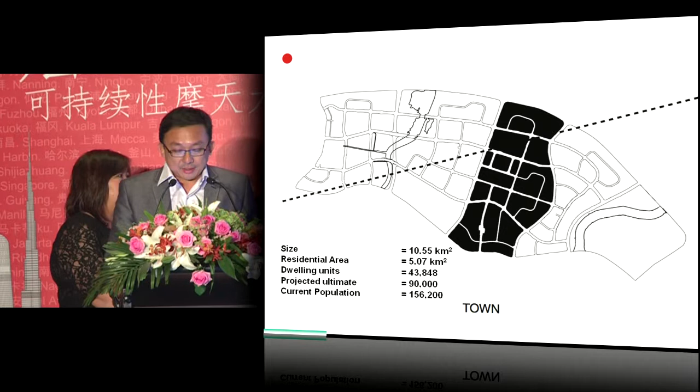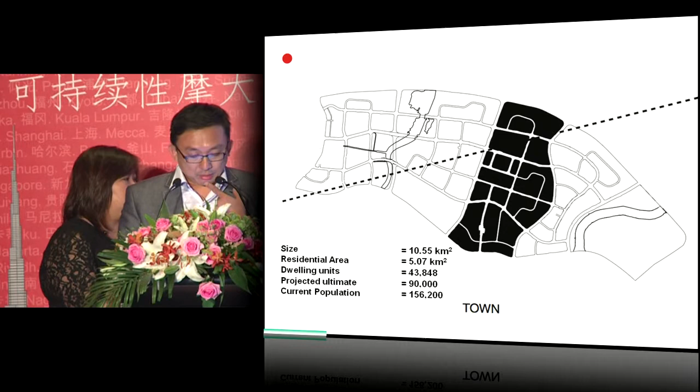I'm going to follow with a series of slides that takes a look at one of these new towns. It's not the newest, but it's still in progress. It's Sengkang on the northeastern side of Singapore. The area highlighted is the entire new town, roughly 10 square kilometers, with a planned population of 156,000, currently about 80,000 to 90,000 persons living there. The area highlighted is one neighborhood. In this particular new town, you have 5 neighborhoods.

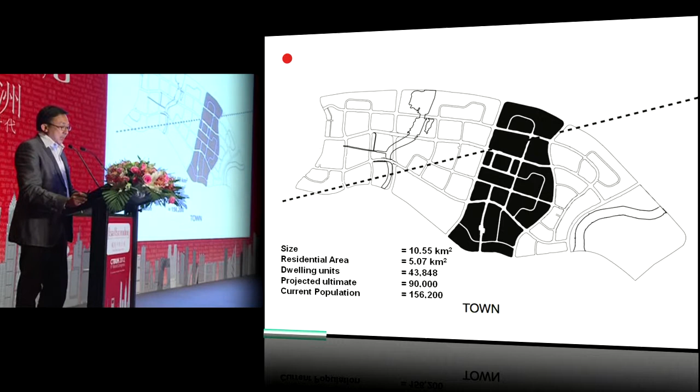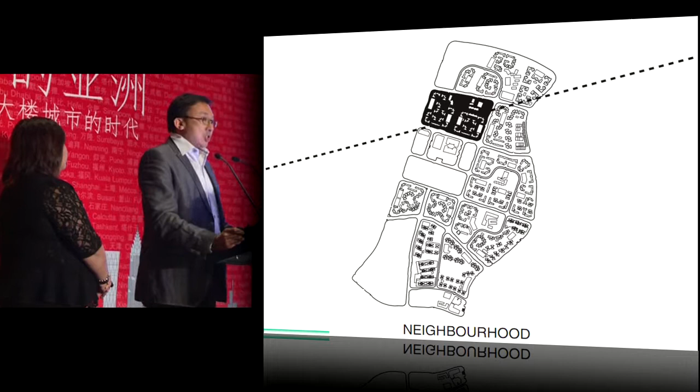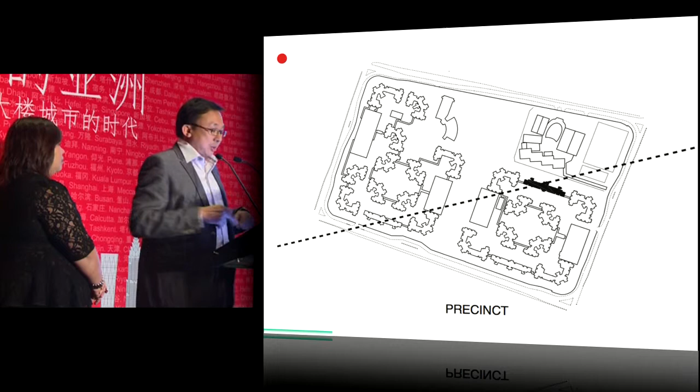And this is one of the neighborhoods, and this is cut up into 6 or 7 smaller precincts. Each of the new towns will have its own facilities on the town level, which were then repeated on the neighborhood level and down to the precinct level. And in the precinct level, this is where individual architects will come in to work on the plot of land, and there are various different blocks and types, architectural typologies being experimented.

So in a kind of interesting return back to our origins, this was originally a river, got polluted, a concrete canal was created, and then now, 40 years later, they demolish the concrete canal, put in high-tech membranes, and recreate a natural river that then cleans the water and brings back biodiversity and life.

We have stadiums for every new town, large recreational spaces, libraries, religious buildings that kind of work harmoniously together depending on the demographic of each of the new town. All the neighborhoods are actually connected by a light rail transit. So you can literally walk from your block to the light rail transit, connect to the center, which will then take you on an island-wide mass rapid transit. So very, very connected and tightly integrated model. Every precinct will have its own little precinct garden.

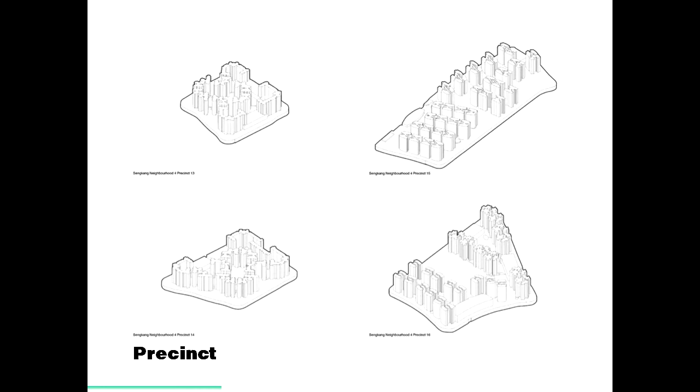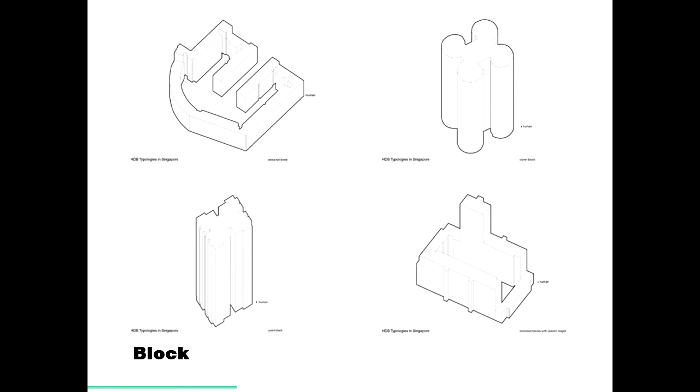So if you look at this sampling of the different types of architectural expression in the precincts, in these precincts there are different types of blocks. I think if you wanted to do any kind of high-rise study or research, you could come to Singapore and you could see all these different blocks, and they are all naturally ventilated with lots of cross-ventilation and lighting, and they have been around, some of them, for 40 or 50 years. And the project that we are going to zoom in on is on the bottom left-hand corner of the screen. This is something that we'll talk a little bit in detail about.

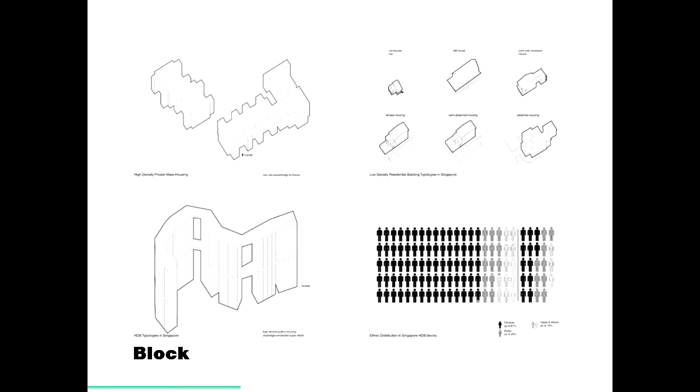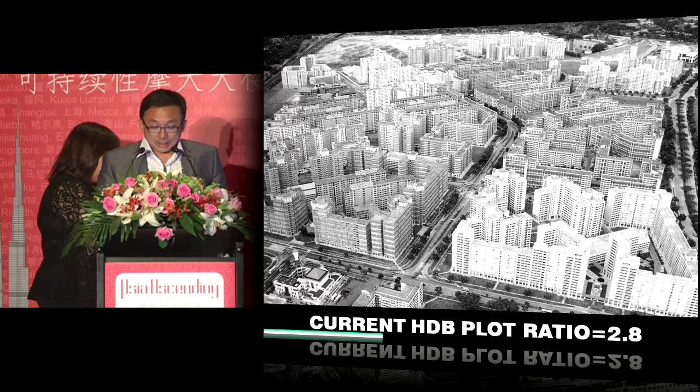The current HDB plot ratio is 2.8 to 3, and this is what it looks like. It seems extremely dense. The latest proposition, after 40 years of constant development, which is still ongoing at the moment, this is a project that continues. It's not something that has stopped. The HDB or the National Development Ministry also found that people were living away from the city and the city is dying at night. So they thought in year 2002 that they wanted to bring more people back into the city.

So a competition was organized. It's an international competition. And our scheme was very fortunately selected as the winning project, which we then completed 2 years ago. So this is a project that has 7 blocks connected by public parks and gardens on the 26th and 50th story. A plot ratio of 9.1, which means that you literally take 3 of these usual HDB estates and stack them up one on top of the other.

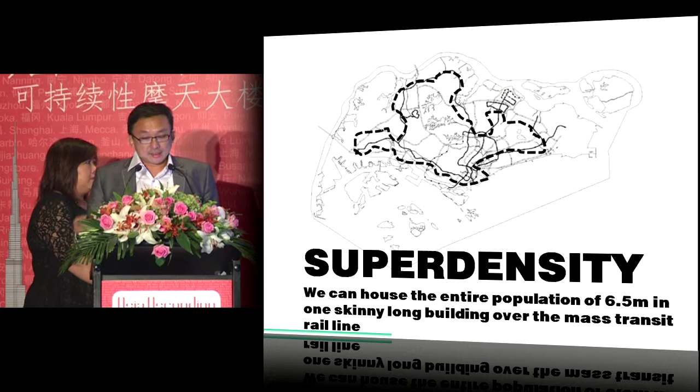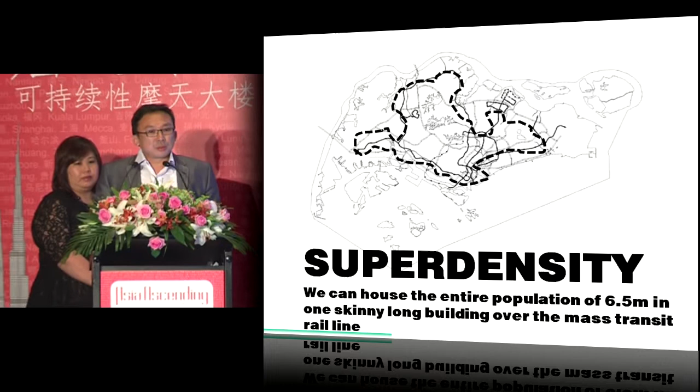And at this kind of density, which we call super density, we can actually house the entire population of 6.5 million people in Singapore in one skinny long building over the mass rapid transit line. So we have about 160 kilometers of mass rapid railway lines, and if we built the Duxton on top of this, we could house the entire population. And actually you do not really need cars and all the other amenities, given that we are able to sort of realize this imaginary or provocative architectural model.

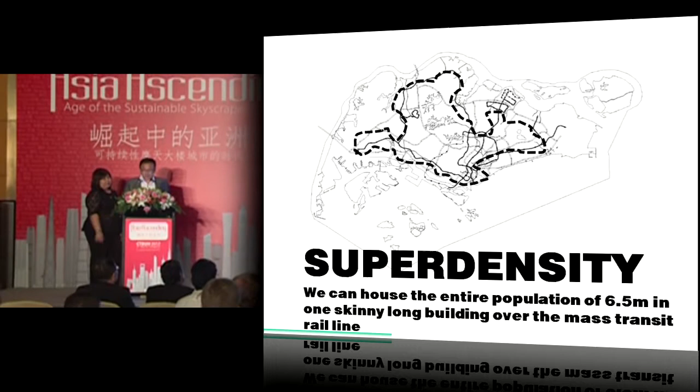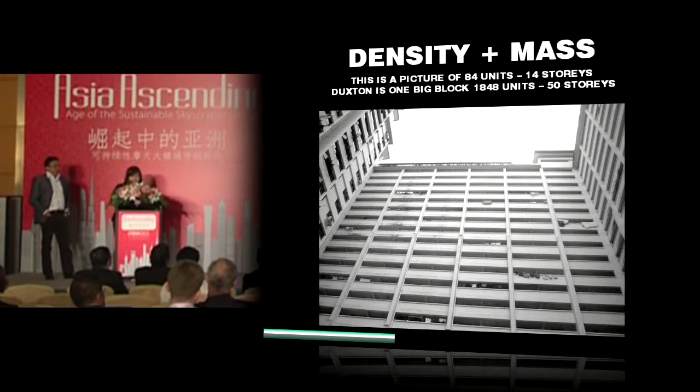Just start talking about the project itself. So when we first got the competition pack, as Pei Ming has actually described to you, there wasn't any 50-story residential block that we could actually go and take a look at in Singapore itself. Of course, we have Hong Kong and nearby Southeast Asian countries, but within Singapore, there wasn't any. So what we did was we went to an existing block that you see here in the picture, and we tried to imagine what it was like to put in 1,800 plus units at 50 stories, and it's really a question of dealing with density and mass.

This is what it looks like at a typical 14-story block, and if we try to imagine the current HDB blocks stacked upon themselves, it could really look like that. So we're looking at a site area of 2.5 hectares and 1,848 units.

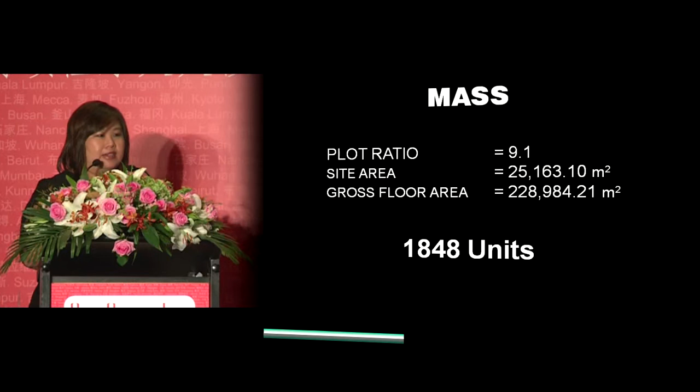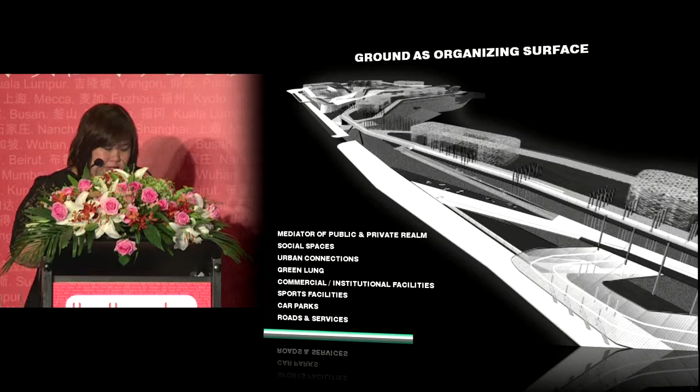So what happens is we focus a lot on the ground itself, because if you look at a footprint for a 50-story building, that really means that it's only about 17% site coverage, which means that a lot of the ground is liberated. So we thought of the ground as an organizing surface where it becomes a mediator for the public and private realm. It's where the social spaces are. We'll have the urban connections, and of course the green lung, lots of green, we love green, and commercial institutional facilities, sports, and of course the car parks and roads as well.

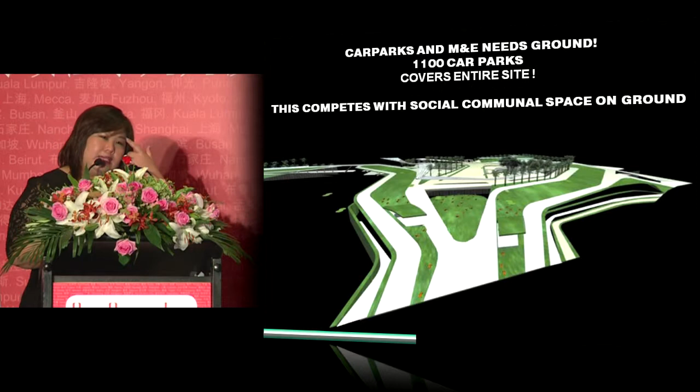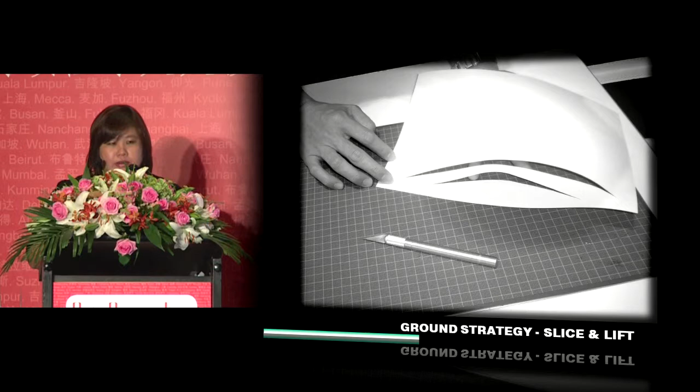But what we have then is that with such high density, there's going to be a huge competition for that ground space with the car parking and all the M&E spaces. We needed 1,100 car parks just to fit into this particular project. So the ground strategy that we came up with was to do a slice and a lift.

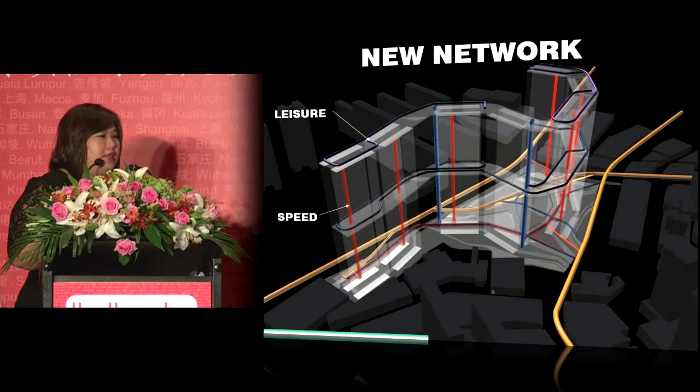And with the slice and lift, it can house all the car parking in a minimum level of basements, because again, this is social housing, public housing, and we need to look at the cost effect of whatever scheme that we put up. And with a cut and slice, it also helps us stitch back to the existing networks and also be the connection to the new network within the site, which is the lift systems up to the public bridges as well.

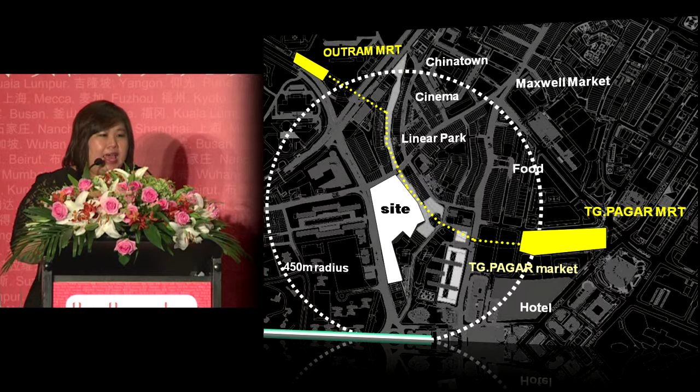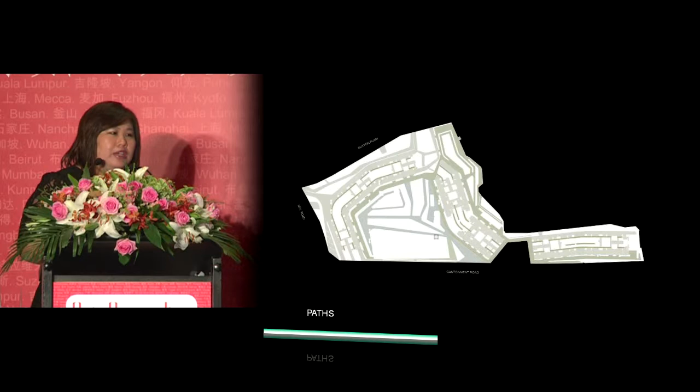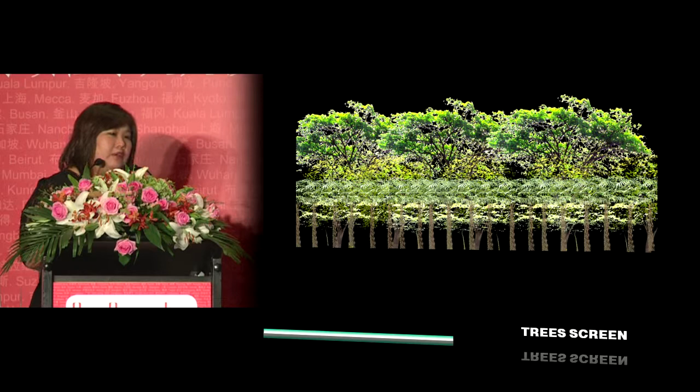It works on more of a layering in heights and types of trees as well, so that at certain perspectives or angles viewed from within, on top of the new ground, there would be lush greenery. And within and on top of that will be plug-ins of pavilions and other activities that can happen there.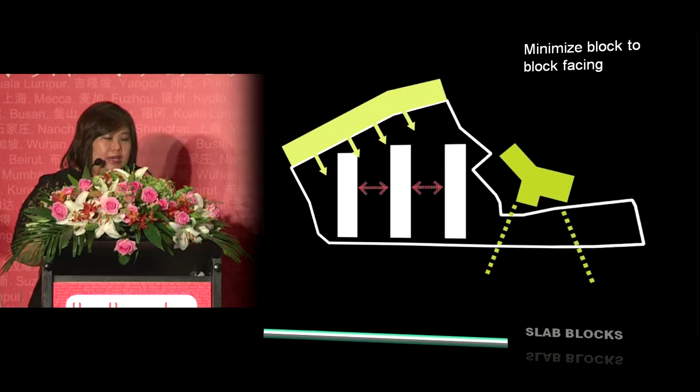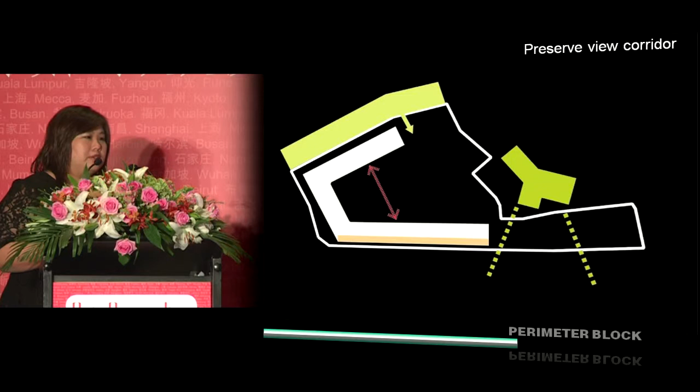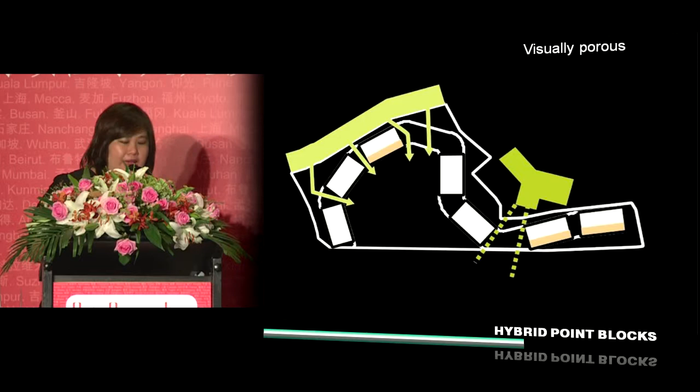So on the blocks themselves, I think we went through many iterations on how the blocks could be placed. And what we were quite sure of was to maximize the views, maximize the block spacing, and also look at bringing the green from the linear park into the space itself. So what we finally came up with is a mixture of point blocks and slab blocks, so that you have that kind of porosity happening,

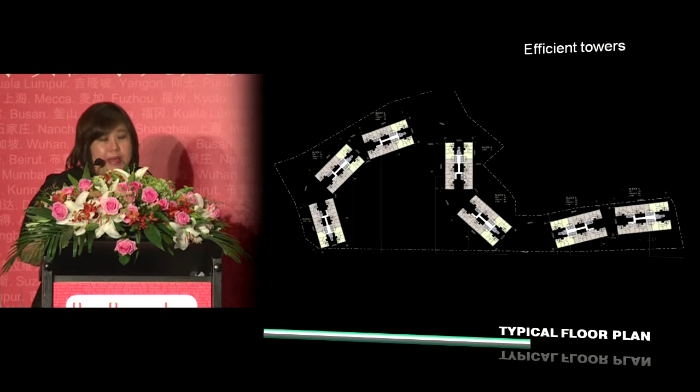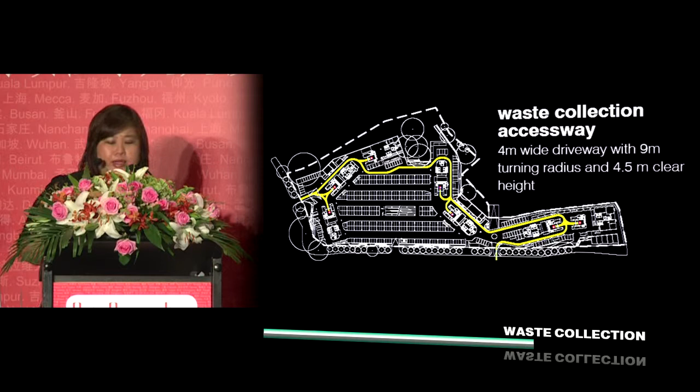and the placement of these blocks would be sensitive to the context itself. So the towers are designed to be super efficient to maximize the number of units that we can build on the site. And the nice thing about linking them and stringing them up means that it became quite easy and fell into place in terms of the infrastructure planning of the site itself.

We felt for sure that the building is going to be a massive building, it's going to be big, and we knew at once that you can't deny the bigness and the massiveness of it. But we thought architecturally we could reduce the perceived mass and density of the building, and we thought of vertical lines, similar to waterfalls, which have that softness to them.

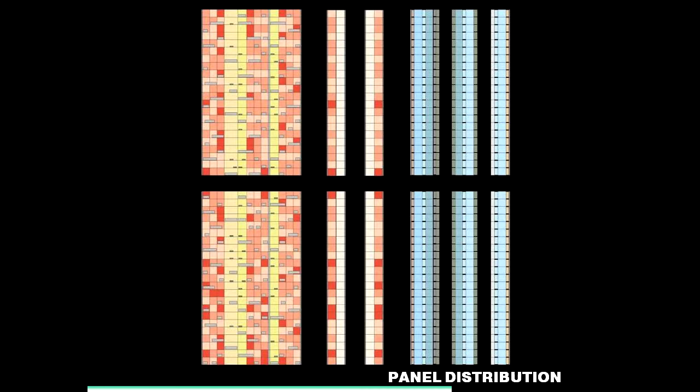And at that time, I think the movie The Matrix started to visualize our whole physical environment as being defined by codes, and we thought that if we could atomize the entire building into small little components and then reassemble them into a new kind of architectural expression, then we could avoid the homogeneity or sameness of repetition, and all this to be done within very tight cost parameters.

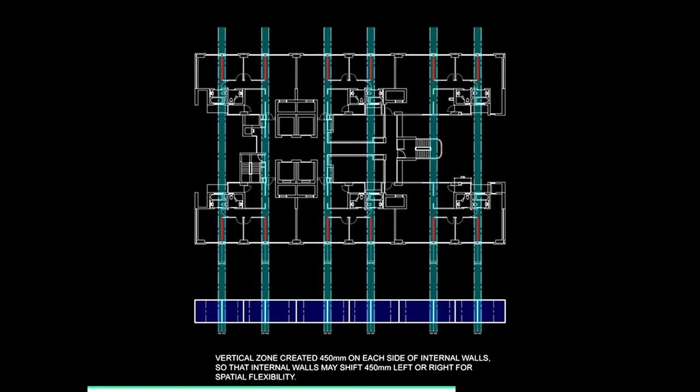We also felt that we needed to allow aging in place, so the flats need to be designed for maximum flexibility. So in this instance, we have created zones for structural location, and within these zones we then allocate solid and glass panels, keeping a very tight control on the percentage of glass and concrete.

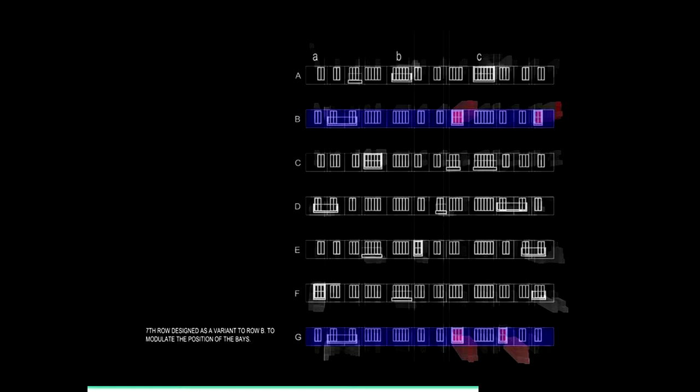And then we added layers of architectural features like bay windows, balconies and planter boxes to create, within a 500 millimeter sort of depth, a huge diversity, so that every unit almost became an individual unit that's very different, and together they form almost like a fabric.

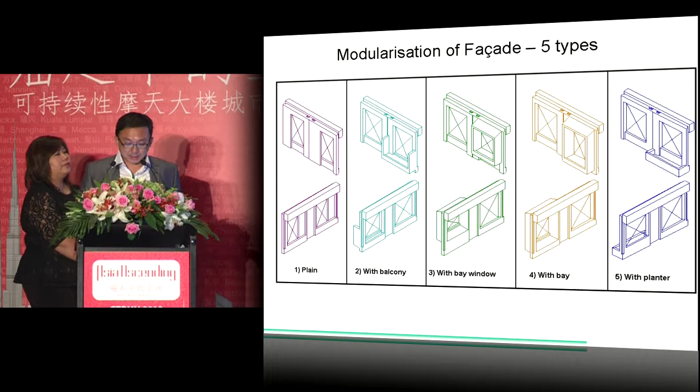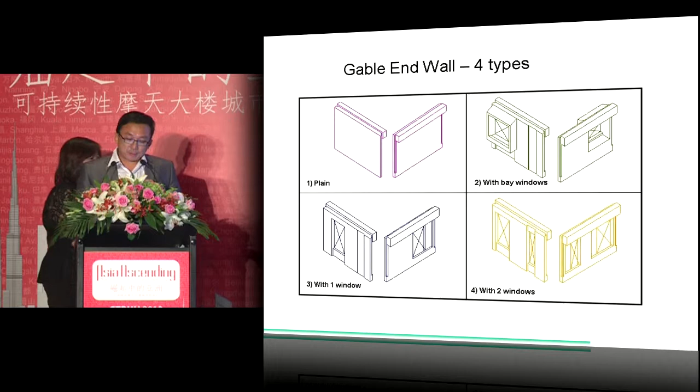And we were thinking about frozen music and all of this kind of artistic expression to be involved in as part of our sort of very, very technical and very undifferentiated way of producing a building. So we ended up with 5 different facade types, integrating rainwater downpipes, beams, and columns into the panels. And these are all cast off-site, with 4 gable ends, and these are then hoisted in place.

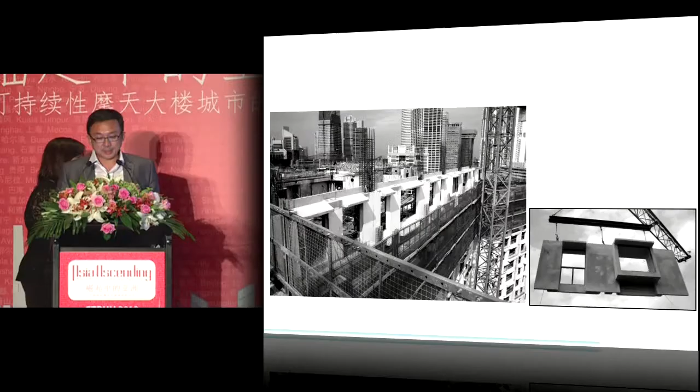Okay, lots more to go, and 10 minutes been flagged.

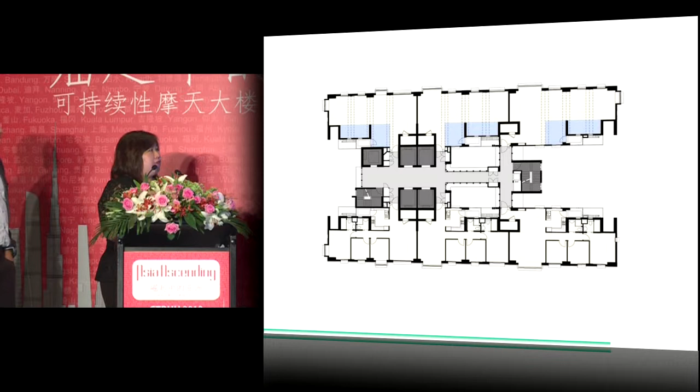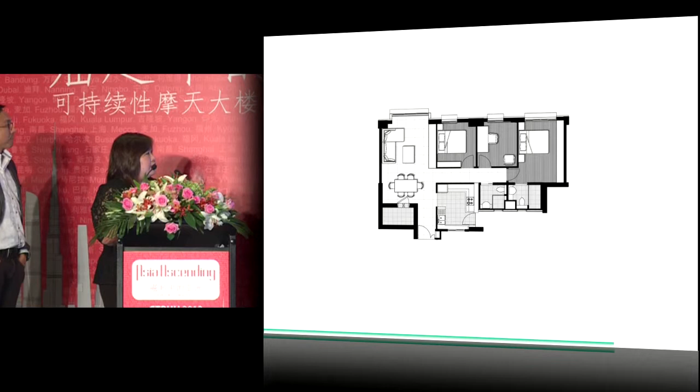Units. So I think Peng Beng's really talked about how we wanted flexibility of units because the demographic of the type of buyers coming in are young couples starting their young families, and we'd like to think that it can grow and change as they live in that space. So with the peripheral columns, this is actually just the base unit here, and we like to think that, at some point in time, you have that flexibility to design whatever units to whatever you fancy.

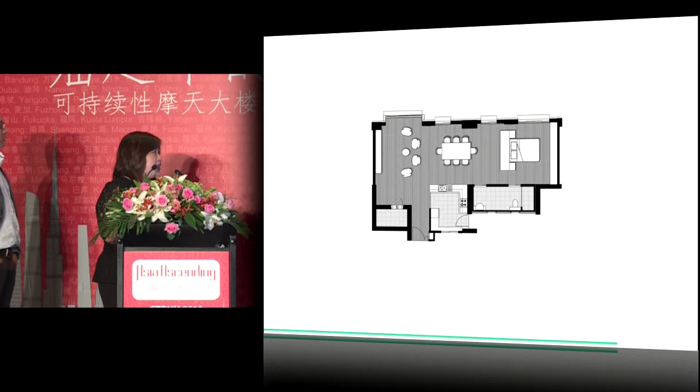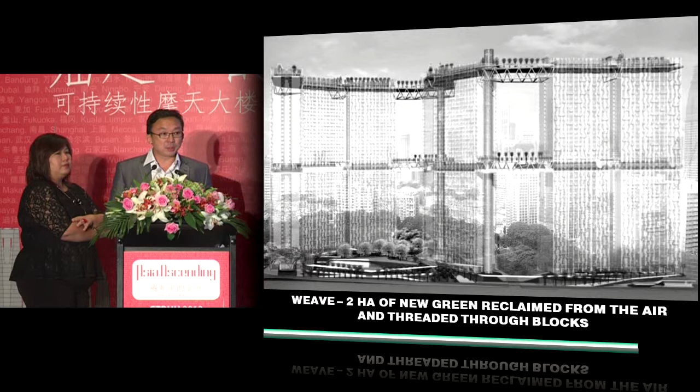So in this case, we thought that by connecting all the mechanical and electrical spaces together, we could then compress the need for these spaces, then giving them back to the communal spaces. And I think we created in total 2 hectares of new green that is literally reclaimed from the air and threaded through the block. I think this idea of combining bridges and buildings was the key idea that was picked up by the judges of the competition, at that time Fumihiko Maki and Moshe Safdie.

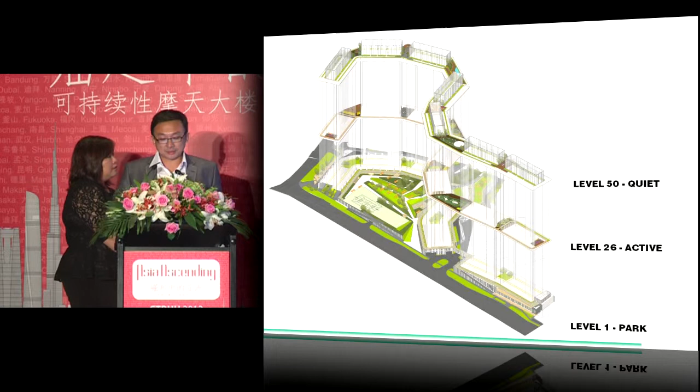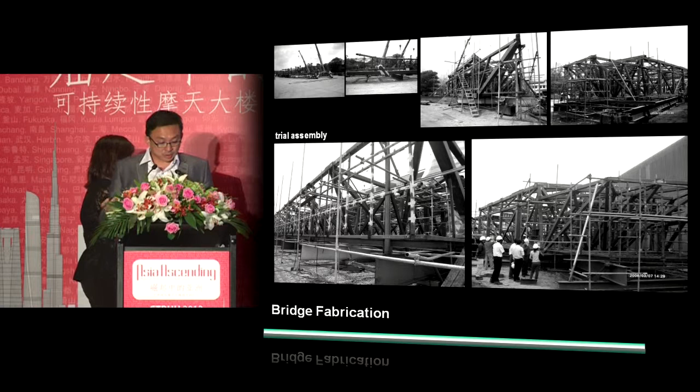So a great level of control had to be set. There was only a 50 mm tolerance in the hoisting up. The first 2 sets of bridges took extremely long, but subsequent ones miraculously got in place much easier. And when the last bridge was installed, this one incidentally is heavier than an entire Boeing 747, and is one of the heaviest bridges to span 2 buildings. And this is the end result.

A bridge right in the air with outdoor gyms and stargazing pods, children's playground, 800-meter jogging track up in the air, little outdoor spaces for you to run away from your mother or mother-in-law. And this is the top of the hill. So that little plate there actually brings that top of the hill to like 3 meters higher than the highest natural hill in Singapore. So we are like the new metaphorical architectural mountain. We thought that, instead of going for a run to Bukit Timah, you could come up to this space here.

And that blue patch is what we dreamt of, a little pond or a little lake up in the air, but being public housing, there was very tight control of water in the public spaces, and this became like an artistic interpretation of our desires. It's actually a rubber patch for children to play in. And this is the Pinnacle at Duxton. I think the striking thing about this project is that it is actually public housing. In some countries, you call it social housing. It's subsidized housing for the people, and it's meant to be affordable housing.